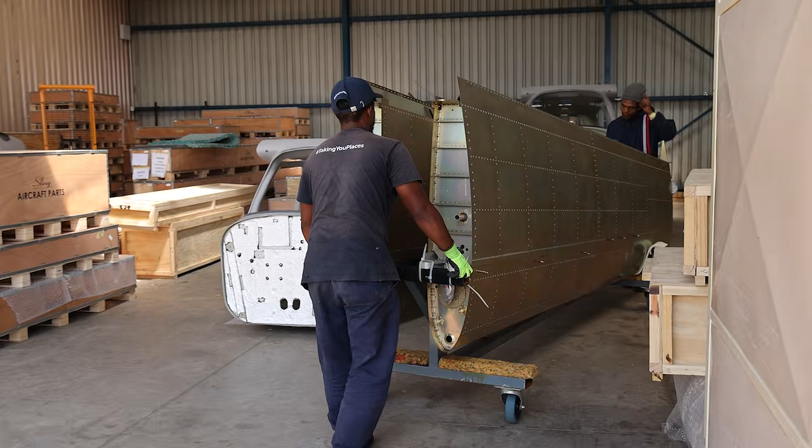So this is where most of the kits end up before they get shipped off to wherever they need to go around the world. As you can see, some of the wings in here are just being packed so they're out of everyone's way. Not all of the wings here are for kits, some are probably going to the spray shop now. You can see the serial number, RTF serial number 067, so that'll be a high wing.

So the wings for the high wing and the TSI, are they still the same? Pretty much, yeah, pretty much. There haven't been any massive changes to the designs in that aspect. We've had small tweaks here and there, to make fuel sending better, and we did a bit of stress analysis where we beefed up a few areas in the top box itself, putting in new rivets so they could handle the stresses a little better. But other than that, there haven't been any major design changes in the wings.

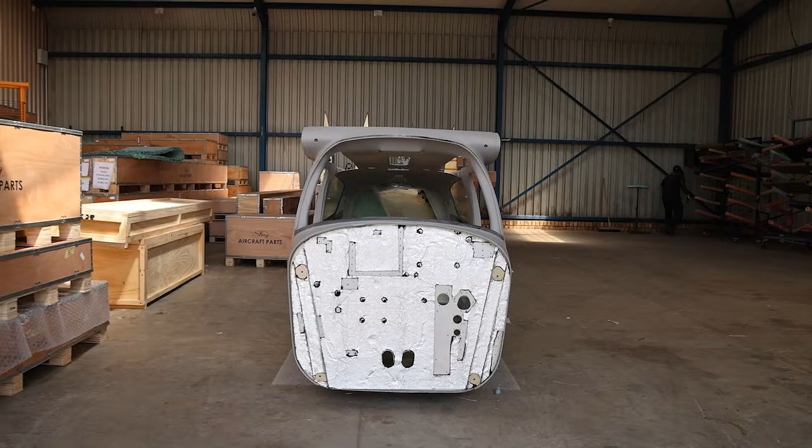Now if you order a high wing quick build kit, this is pretty much what you're going to get in terms of your fuselage. We follow the 51% rule with the quick builds, so we build the kit up to a certain point, and then you have to take it on your own and finish the rest of the aircraft. What's nice with the monocoque design for the high wing is that the fuselage is pretty much already done, the actual structural integrity is already built, and there's nothing you can really mess up when putting together your kit, unless you take a grinder to it.

And then a basic do-everything-yourself kit will look like that when it arrives, and you have to build the tail and the rear section of the fuselage yourself. That's for the really adventurous builder who wants to give himself a serious challenge. Sorry, everybody's getting in everybody's way. So what I did was start from a flat, what's called a flat box kit.

I had the fuselage, though it looked a little different back then. I was able to do all of it, and when we get to the top box part, the fun for me was being the first able to actually work on the top box and work on the wing spars and rivet those, which normally a builder, whether you got a quick build or a flat box kit, you would never have the opportunity to do. So now the reason the top box isn't in the flat box...

Do they have to install the top box? Yeah, you still will have to install the top box even on the flat box kit. But for any flight critical components, we will do the actual construction for you, and that includes the carry-through spars on the top box.

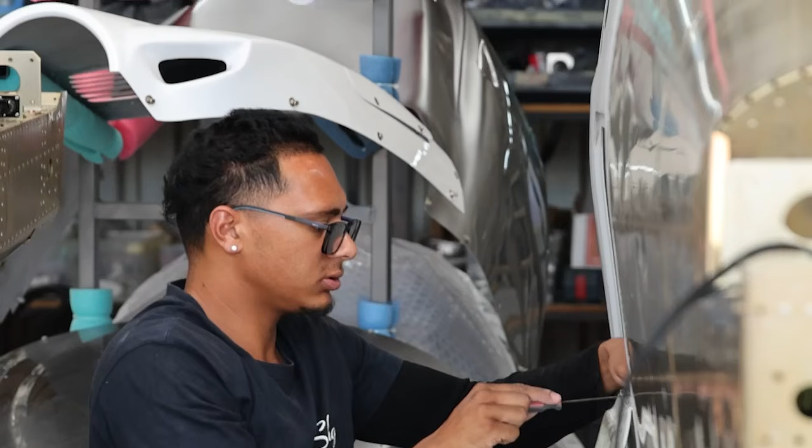So let's move across now to the high wing final assembly side. This is our high wing final assembly department, basically where the magic of turning a kit into a fully realized aircraft happens. Every aircraft that gets built in here is a ready-to-fly aircraft that's been purchased by a customer, and you can see that this is literally start to finish.

If you look down there, we have the most basic form of the high wing as it arrives from the factory. Pretty much the way we do it is our guys will receive a kit from the factory, and our guys are trained to be able to assemble the kit for the customer and build it to Sling's quality, which is very high, I must say. So the kit will arrive looking like this.

I think we've actually got a tail dragger here. Yes, we do indeed. So one of the options we offer on the high wing is also a tail dragger variant, also with the 916 Rotax, and then we've got the tricycle gear as well.

So what our guys will do is all of the prep work and everything, and they will assemble the aircraft to a certain point, after which it then gets sent over to the paint shop over there, which we'll walk through now. And then after paint, it will come back here for final assembly, and we'll put everything together.

We'll do all of the plumbing and wiring of the engine. We'll wire the Garmin Avionics into the panel, and then Rian, who you met earlier, will take one of them up for a test flight. He'll do about an hour's test flight as the maiden flight of the aircraft, and then he'll come back and tell us whatever snags he may or may not have found.

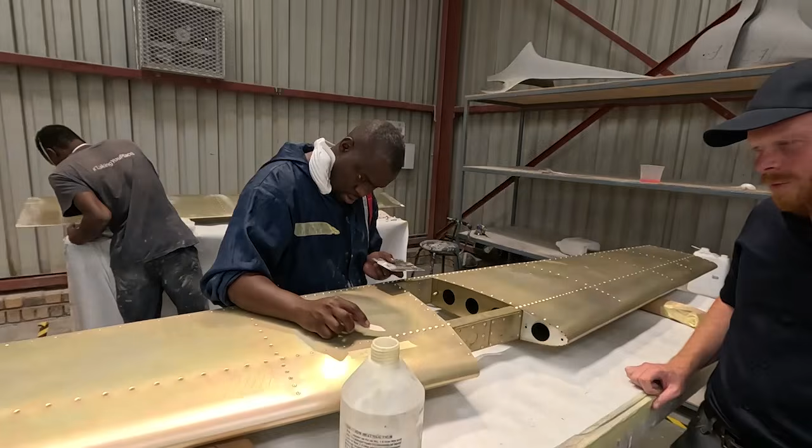So what we use to fill the rivets is a polyester resin blend. It's a two-part system that we mix with the resin and the hardener. Once it's set, it's incredibly strong and durable, and it's sandable as well, so it makes it quite nice to flatten down before we paint over the top of it.

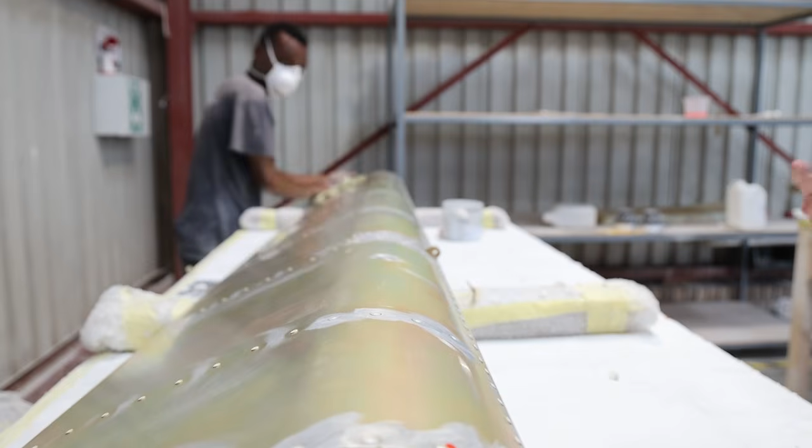One question we get fairly often is why do we Alodine the parts if we're just going to sand the Alodining away when we're doing paint prep. The answer is the Alodining we do is more for the inside of the empennage and the wings, to protect against corrosion on the inside, because the outside obviously gets its own layer of protective paint when we paint it. So we're more worried about protecting the inside of the aircraft than the outside.

Yeah, so let's make our way through, get out of all this noise.

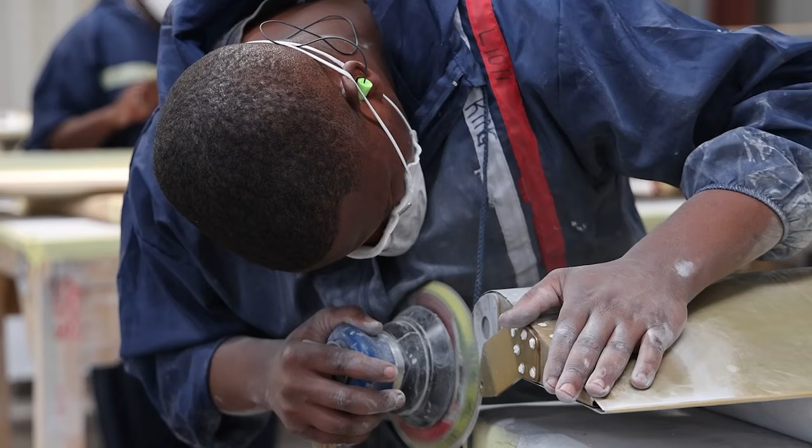Here you can see a good example, like Linda mentioned earlier, of the difference between the alodining of the aluminium and the anodizing. The wing spars are anodized in what's called a natural or clear anodizing, so it doesn't really add any color to the aluminium itself, but it helps a lot with the protection of the metal.

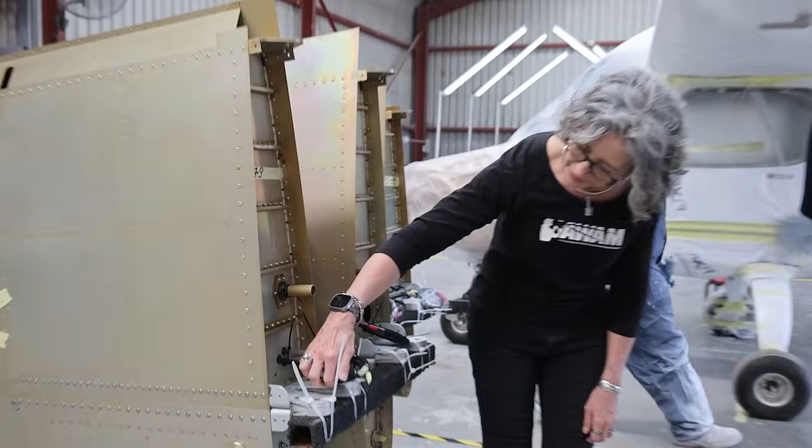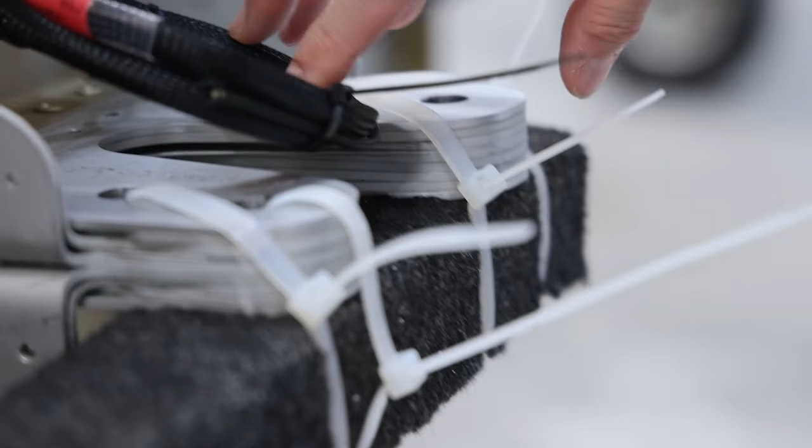I also want to point out that this is a laminate, multiple layers like any laminate would be, and this adds a lot of durability. When I used to have a Cessna T210 there was an issue with the wing spars, but this wouldn't have that kind of issue because it's aluminum, anodized, and a laminate. So if there's an issue on one layer, it's still fine, am I correct? 100%. The other thing that helps a lot doing it this way is that if you do somehow manage to damage your wing spar, it's a lot easier to disassemble the laminate, replace just the damaged part, and re-laminate it rather than replacing an entire wing spar.

Oh, I hadn't thought of that. If you look at other aircraft designs, like an I-beam extrusion, some of those are complete solid spars. If you get a bad case of hangar rash or a bird strike and that spar gets damaged, you have to replace the entire spar, you don't have a choice. Whereas with these, in certain cases, you won't have to do that because you can remove one of the layers and replace it with a new one.

Well, I never thought of that. Yeah, and these are the holes.

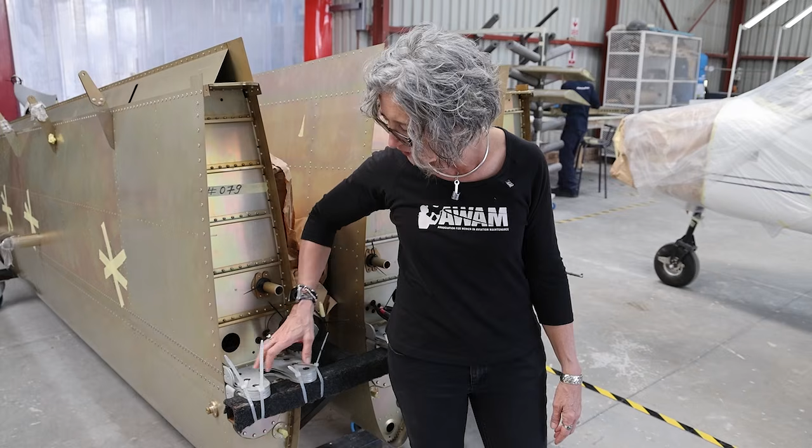One of the great things about the high wing is that there are no struts, just a cantilever wing. You've got these incredible bolts that actually have a pedigree, they're tested, they have papers, holding this to the incredible top box, which we will see. There's no strut here, as you can see. Part of the magic of this design, what Mike Blyth, the legend, the brilliant Mike Blyth came up with, was a way to effectively attach and undergo all kinds of loads and strains with the use of these bolts. There's a bolt on the rear spar, but that just kind of keeps it in place.

These bolts have a pedigree, they have papers, they've been non-destructively tested before they're put in, is my understanding. So it makes it a little bit challenging for people to know where to push when we're moving the plane around, because everybody wants to go for the strut. But there are plenty of places you can push nonetheless.

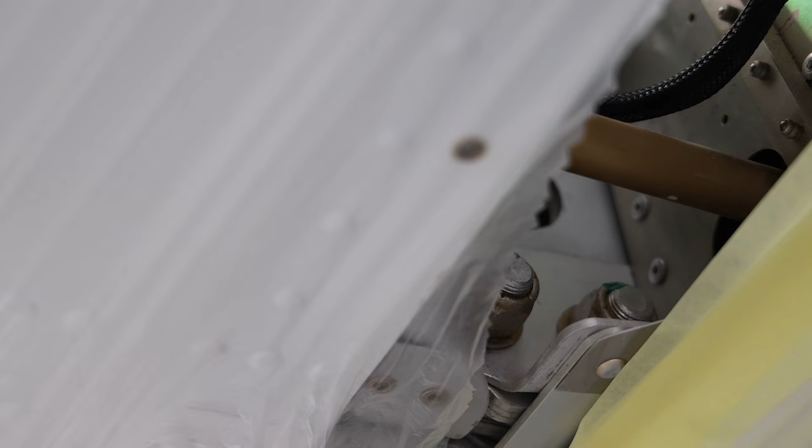You have this wonderful unimpeded view out the window, which is one of the things that I love about my airplane. I've put hammock hooks so I can hang a hammock underneath the wing. If there was a strut in the way, that would be very uncomfortable. Here, if you come and take a look, you can see the size of these bolts, the primary bolts that are holding the wing onto the top box.

Do we want to move through to the paint section now? Yeah.

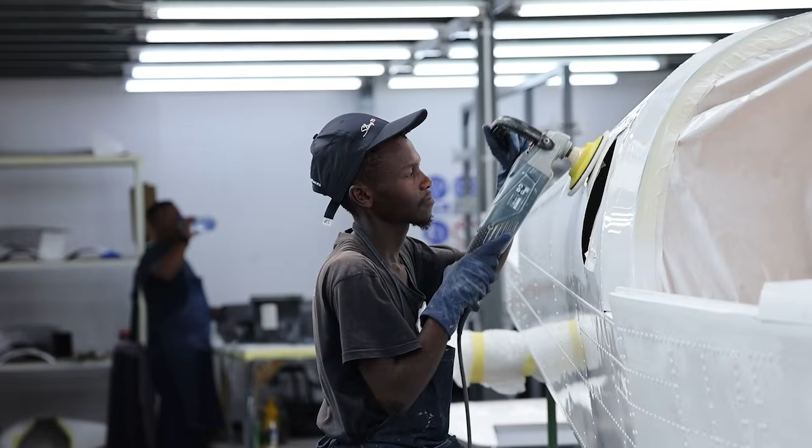It's a little bit quieter in here. This is pretty much where final paint work gets done, all of the touch-ups, the polishing, and everything before the aircraft is finally assembled. This is where paint goes to be finished off, to be polished, to be looking absolutely spick and span before we deliver it to the customers.

Funny story about the spray booth that's behind you. This spray booth was pretty much, we lost an aircraft but gained a spray booth, is the story that I've been told.

Back when we were first initially doing the flat spin testing with the Sling 2, one of our test pilots took the Sling 2 down to the coast and he was over the water doing flat spin testing on the aircraft. He put it into a flat spin and wasn't able to get it out. Unfortunately he had to ditch the aircraft. He had a parachute with him and had to jump out because he couldn't rectify the spin.

The second that he jumped out and pulled the chute, the aircraft rectified on its own and continued flying. So he, from his parachute, watched this aircraft do a couple spirals and end up in the water, thinking to himself, well, that's just grand. But luckily the aircraft was insured, and with that insurance money we got from that aircraft, we were able to buy the spray booth, and it's been with us ever since.

We basically offer any paint scheme that a customer can come up with, we'll pretty much do. There's very rarely ever been a time where we've said no, we're not able to do a paint scheme like that for you. We've done pink slings, we've done purple slings, we've done anything that you can think of, we've done it.

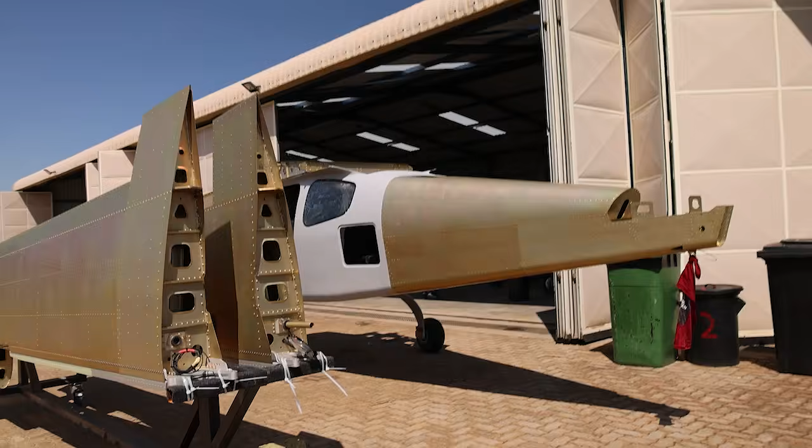So I'll walk you guys into our research and development department, pretty much the brain of Sling. Every single design, every single test, every single drawing, everything that has anything to do with designing an aircraft starts in this department.

Currently we have a total of about 20 people working in the research and development department, 4 of which are full-time aeronautical and structural engineers, including Terry Musica, our current head engineer, who actually used to work here and left us about 7 years ago to pursue other projects. He's recently rejoined us as head engineer and he's been making waves, making very good progress with ironing out production, design, and engineering processes. Hopefully he's in the office now and we'll have a good chat with him as well.

Yeah, so this is our research and development department. As part of the requirements to be part of R&D, you have to know how to play table tennis.

Because during our lunch times and tea times we just de-stress and play some ping pong, and we have a little league going on all the time to see who's the king of the table at the moment. How are you? It's good for you. Well, I haven't been here for a while because I've left the R&D department now, but I'd say I was pretty good, in the mid-range I'd say. It's good for the brain, absolutely, it's a good de-stressor.

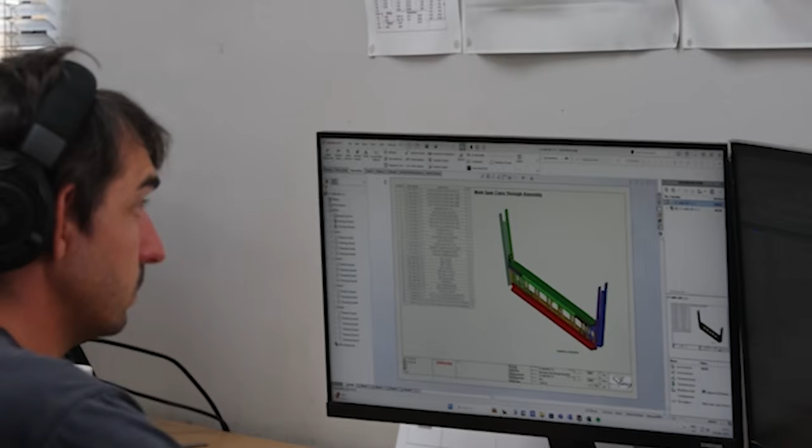The full process of building the aircraft starts here. The collective minds of everybody in this room is absolutely wonderful. I think you would struggle to find the same level of intelligence in a single office anywhere else, very close. You would really struggle to find a group of people as smart and dedicated as the people in this room right now.

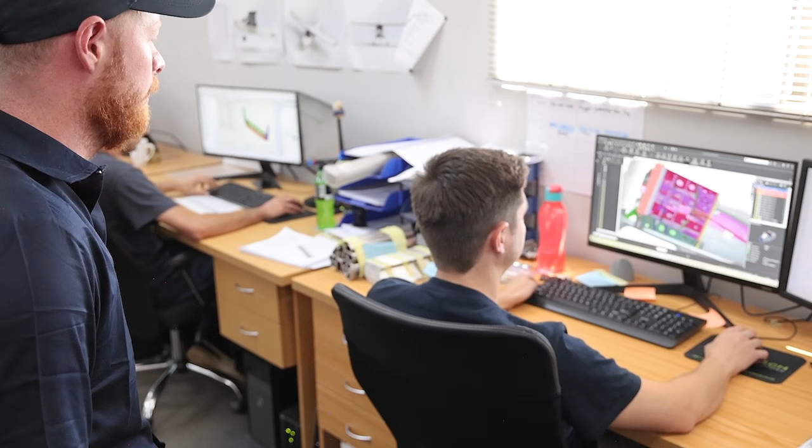The amount of work that goes into the designing and refining of the aircraft is astronomical. It's a very large undertaking, and as a company we are very grateful for everybody in this R&D office, because they really do work their butts off to make sure everything runs smoothly on not only the production side, but also the kit building side.

We've got a technical department that helps with technical queries for our kits. If any customers have questions, whether it's not understanding how to put something together, or wanting better clarity on some of the construction manuals, we are available 24/7 for them. Do we have a construction manual somewhere nearby?

To flip, I think we might have one on Terry's desk. Terry, is the throttle quadrant still on your desk? Can I grab it from you?

Get one open on the computer though. If you get a construction manual in your kit, it's a nice big A3 printed book, fully printed in color. But this one we were just using for discussion purposes on some of our throttle quadrants.

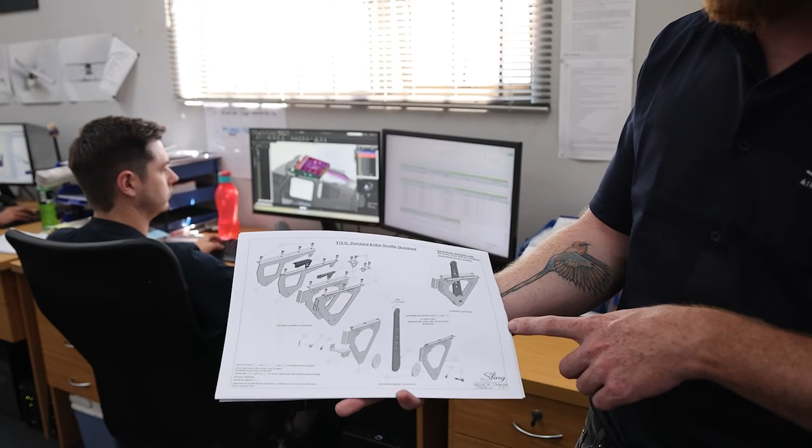As I mentioned earlier, one of the things I was busy with in the R&D department was the throttle quadrant design, and this is a very good example of what your construction manual will look like when you receive it. It will detail every single part you need to consider and every part included in your kit. It's pretty much like a very complicated Meccano set. We always say that if you can put together a really complicated Lego set, you can put together a Sling.

Obviously everything to do with the wiring and the avionics we do here. As you've noticed throughout the entire factory tour, we try to do as much as we possibly can in-house, and outsource as little as possible, because then we've got much better control over the quality we're able to produce.

For our U.S. customers, one of the primary vendors doing panels over there is Midwest Panels, and talk about customer service. They built my panel in the States, we shipped it over here, and then Steve and Adam both flew out here and installed the panel for me. Talk about customer service, huh? They came all this way, and we had a wonderful time.

I wanted the Midwest panel because there were a few features they had that at the time you didn't, I don't know if you do now. But also for support and everything, I thought it would be best to use Midwest, not that you guys don't do a great job also. So we work very closely with Midwest, we're in contact with them all the time.

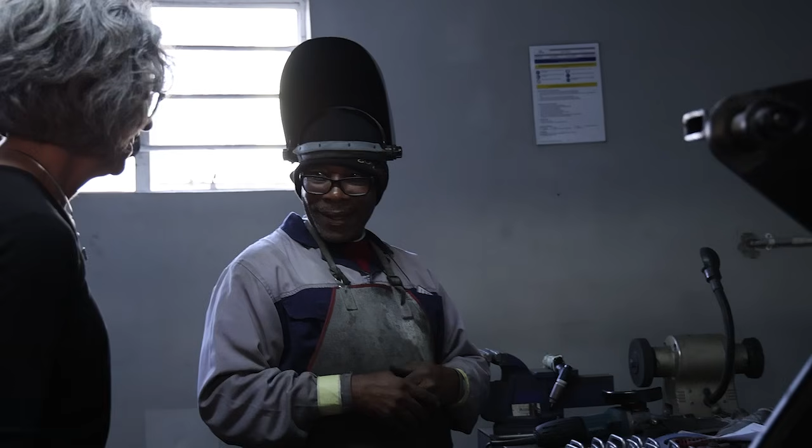Oh my gosh! My airplane, hello! Hello, good to see you. Fine, fine, you're working your magic. This is one of the true artists in all of Sling. I think I'm safe to say you are the most skilled artist of Sling, is that correct? I think that's correct. Yeah, I'd agree. Thanks, Enoch.

Let's see what the welding on this side is. Looks like...

Oh wow, good stuff, so these are nose gear tubes. Two welders working here, and then we've got another two on that side.

Art in motion, this is great. Thank you, yes. And then everything they weld has to get polished and cleaned before it can get coated. Obviously there's inspection at every stage of the manufacture of the part.

Hi, how are you doing? Thanks, yourself, Linda, great, great. Can I get a hello? With that, that's all right. I wore black today, so I wouldn't have to worry about it. I'm prepared.

Oh my gosh, oh wow. This is super thin, so that's amazing, it's a really hard thing to achieve. Bravo! Bravo! Well done.

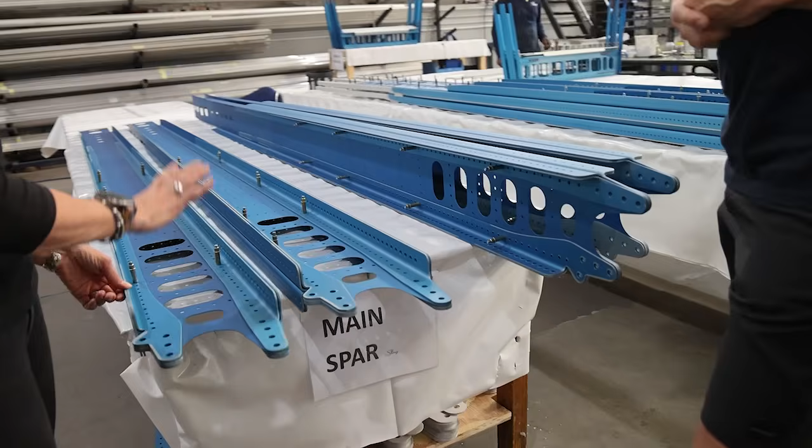So here are the new spars. Yes, the new TSI spars. So eventually they'll all be like this, then we'll phase out the blue. But it is quite nice, it looks nice.

Are the TSI spars and the high wing spars different now? They are different, yes. And this is what I was talking about, the laminate approach to the spars. There's more to go, it'll be thicker. So they're still busy assembling here, it gets thicker and thicker. Easier to repair and stronger.

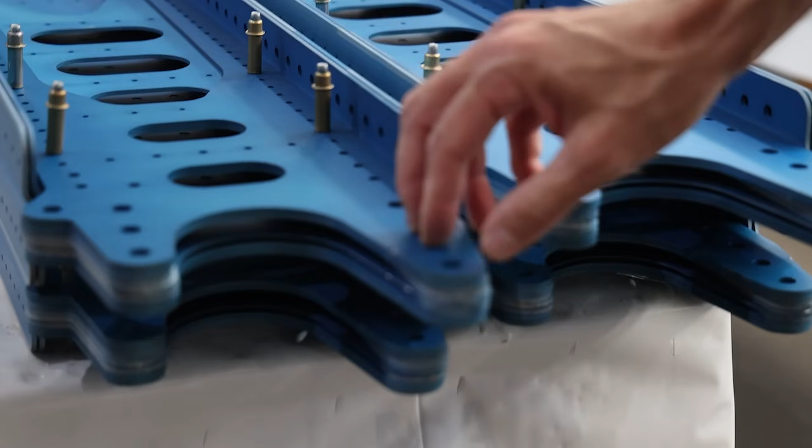It's got a lot more, you can almost say, resilience built into it, because a crack in a solid piece is devastating. But if there's a crack in this, it's just one of the layers that's compromised. So this is much stronger, and it's a better design for what we're doing. Excellent.

The high wing — I had the opportunity to work on the construction of the top box and the wing spars and whatnot, so I had a really great opportunity.

We were talking about some of these bolts. Are these different than the ones that hold the wings on, right? Yes, they are different. And the ones that hold the wings on, as I understand, have a pedigree — they've undergone non-destructive testing, they have paperwork, it's a special bolt. But even these ones are also de-embrittled. De-embrittled, yes, that's the word. Oh, I love that word, de-embrittled. Excellent, that's what they do.

Tell us about those bolts. So it's basically just a heating process that removes the internal tensions in the bolt. In the manufacturing process of the bolt, there's a lot of tension inside it, and that tension, if you use the bolt under pressure, when you torque it, those tensions can lead to various forms of malfunctions, cracking, or whatever the environment exposes it to. So the de-embrittlement kind of relaxes the bolt.

Oh nice, because there's a lot riding on these bolts. And we were talking about how everything is riding on them — that's right, everything is literally riding on those bolts. But also, one of the great things about the high wing design is that there's no strut, and this design and those bolts are part of what make it possible to carry the loads. Absolutely, if you think of it, it's a handful of bolts that the wings are attached to the fuselage with, so they are crucially important.

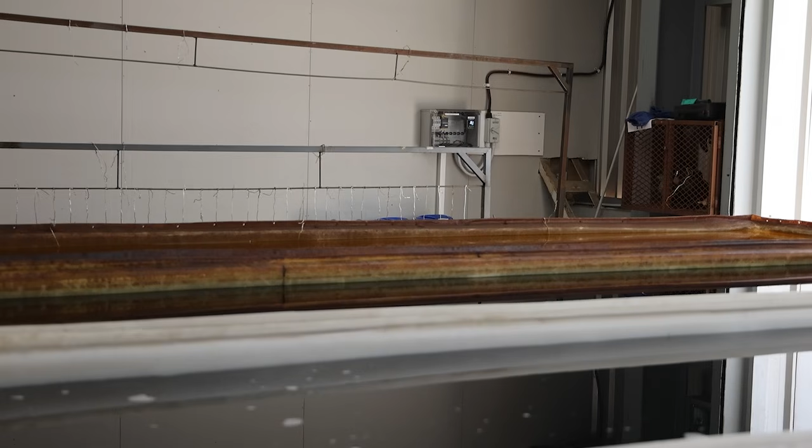This is the alodining process. With this process, basically there's four baths. The first bath is an acid bath, just to clean the sheets properly. Then it gets to the second bath, which rinses the acid off. The third bath is where it gets a chrome covering, so it's basically etched into the surface of the skin. The last bath rinses it. This is a tightly controlled process. We've got timers, the parts spend a specific time in each bath, and it's also temperature controlled, so we get consistency in terms of the coating we do, and that's why they come out gold.

There's some nice ones over there. You can take some snaps of the ones that are done and drying. See the acid doing its work, it makes nice patterns sometimes.

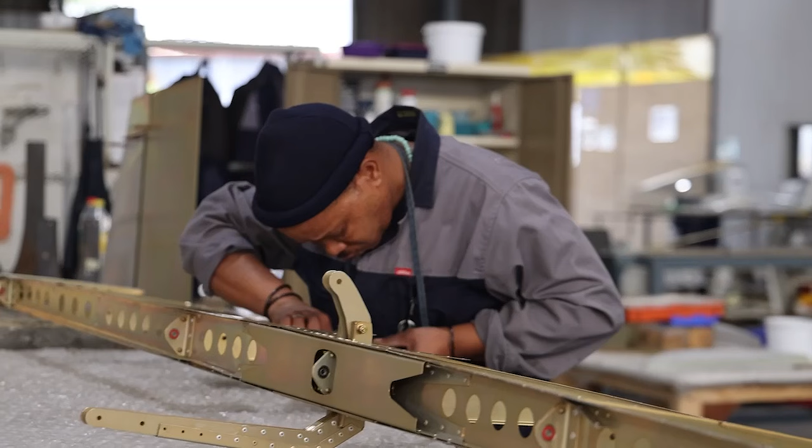This is also another place where art and engineering meet. It's really, really difficult to get the construction and the alignment of the verticals and the rudders and the stabilizers and everything hooking up with each other well.

We are one of the very few manufacturers in the world who make our own windows, and it's slippery because we use silicone between the mold and the perspex to make sure it's got a nice smooth surface, so it doesn't stick to or imprint from the material.

Yeah, let's go through here.

Hey, how are you? Good, thank you.

Every now and again we get these crazy color requests. We're busy getting a custom purple batch made. We had to get the makers of the thread to do custom thread for us to stitch with it, so it's quite a story, but that's the name of the game, and it costs more, but comes out in quality.

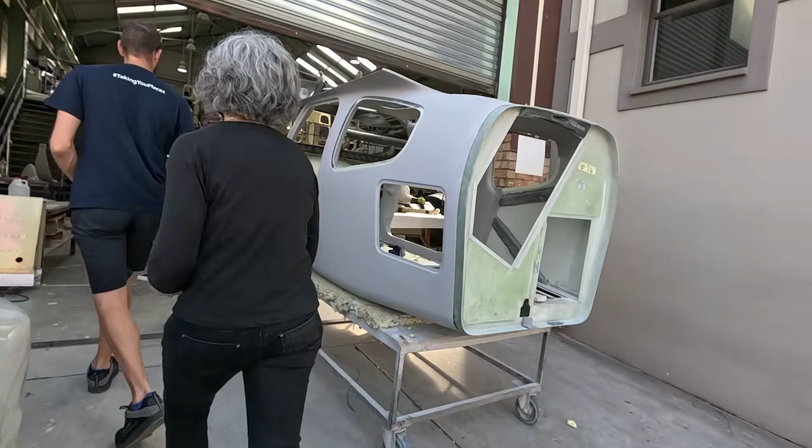Okay, I think let's start in the back at the top corner, because it kind of goes from there.

So this is where it all starts. We've got the different types of materials that they use. Every part has a recipe for how you build it - it tells you the kind of material, in which orientation it needs to line up, the resin mix, and how you cure that. All of these things on the walls are the different templates, the shapes they need to cut out of specific materials. There's some carbon fiber - he's busy cutting the pillars for the high wing fuselage.

So this is where it starts, and then they make up these pre-packed parts, where you take the pack and you know every bit that you need is in there and it's cut properly, and you just need to follow the recipe to build it.

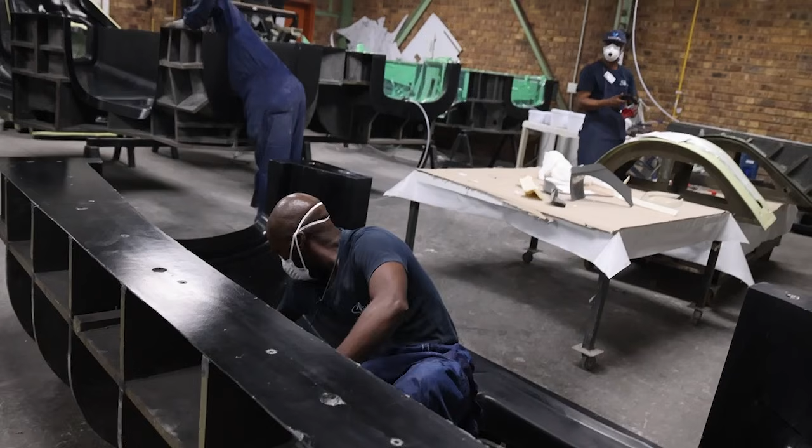So these guys are busy prepping the mold for the next high wing fuselage. Essentially it's like cleaning it first and then applying a good layer of polish.

This is the only area of Sling that's air conditioned, climate controlled, so humidity and temperatures are controlled.

Once it's cured, it goes for a curing cycle in one of the ovens, and then usually they remove it from the mold and it goes for post-curing a second time in the oven. Once that's done, they demold it. This is usually the demolding area, and then it goes to finishing.

It's Hendrik. You good? Hey, good. Oh, so good to see you. Yes, always good. You well? I'm grand, especially when I'm here visiting family, you know? It's so good to see you.

We're going to go in there quick, in and out - very noisy, quite dusty. This is the high wing finishing area, so you'll see how it is. Okay guys.

Parts cleaning area - I don't know if you can recall what it looked like, but we've brought in a lot more structure. We've recently introduced more of a workflow here, so parts move from one table to the next instead of a person bringing a part and sitting with it until it's finished. So it's more process oriented. We've brought in a lot more racks to organize ourselves properly. Still a work in progress, but I think we're making progress.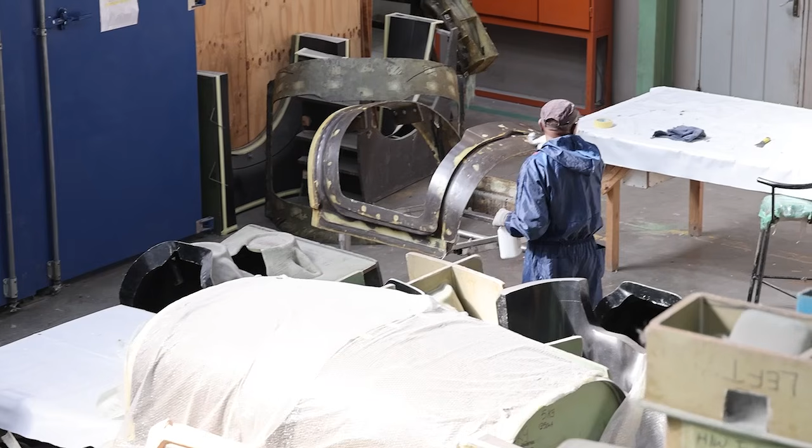Excellent. Yes, sir, it's like high wing heaven here. Yes, it's quite a big step.

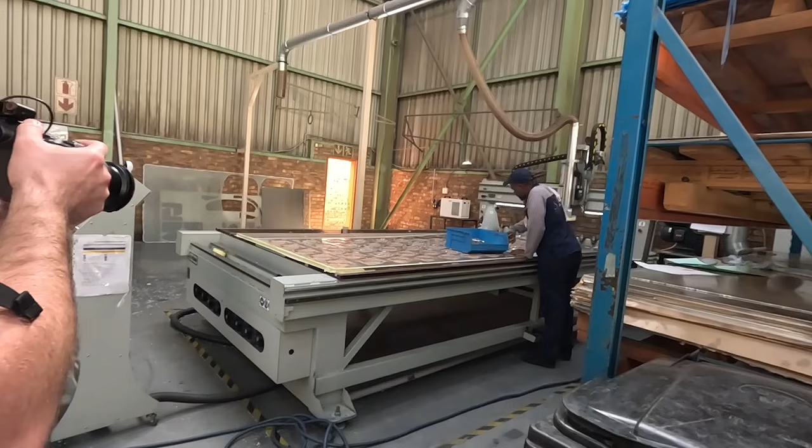We make all the aluminium parts here. We also cut a few bits of plastic and composites. Our one machine is in for refurbishment, so this one's running 24/7 at the moment.

I see, yeah, there was. We usually have 2 CNC routers, and then we've got 2 CNC punches, and then 2 bending machines and 2 hydroforming machines. This is quite nice to watch, actually.

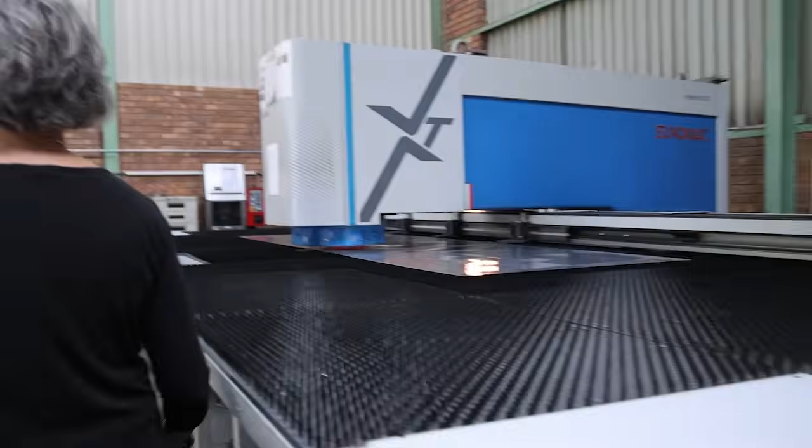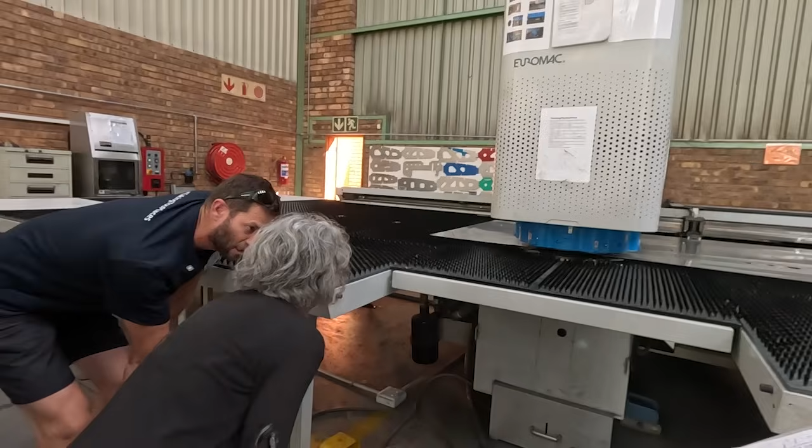How's it, guys? Is it finished? Is it going? You can see how in there is like 6 to 8 different dies, and it spins, choosing the right one very quickly.

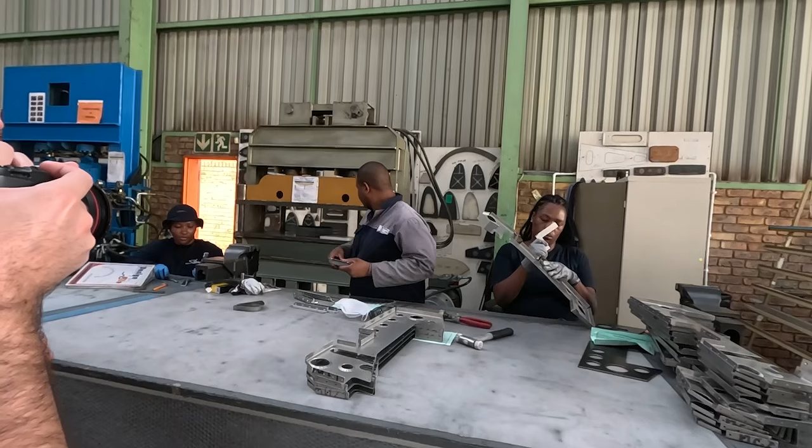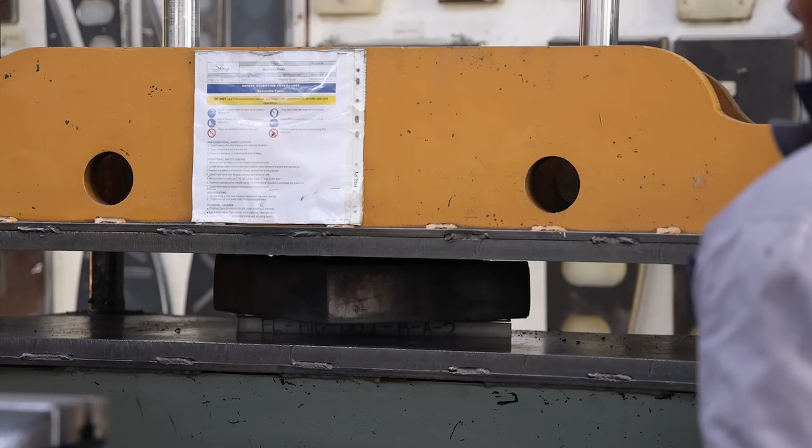He takes a flat part, and he's going to bend it in a 3-dimensional bend. Comes out 3D.

Thank you so much for all of your time and attention. It is just what you guys have accomplished, the growth that you are managing brilliantly now. It's just so wonderful to see the improvement. And you were saying we're up to how many high wings by May? 8 fuselages. Yeah, and that tends to be the long pole in the tent on the high wing kits, right? The fuselages.

Well, there you have it. I hope you've enjoyed seeing how the Sling aircraft are made and manufactured. If you've made it this far through the video, I'm going to assume you have. It's really a pleasure for me to bring this content to you because obviously I have a lot of passion for the product and for the adventures that my Sling High Wing has and will continue to bring into my life. But more than that, I'm very grateful for the people that I have met and become lifelong friends with here in South Africa, but everywhere within the Sling community. It's an amazing group of people, and I'm just very grateful.